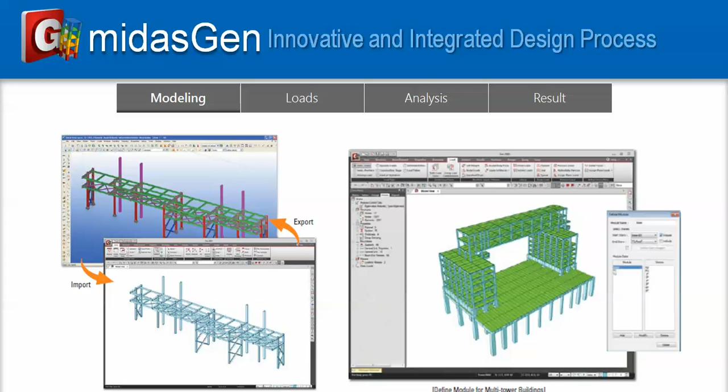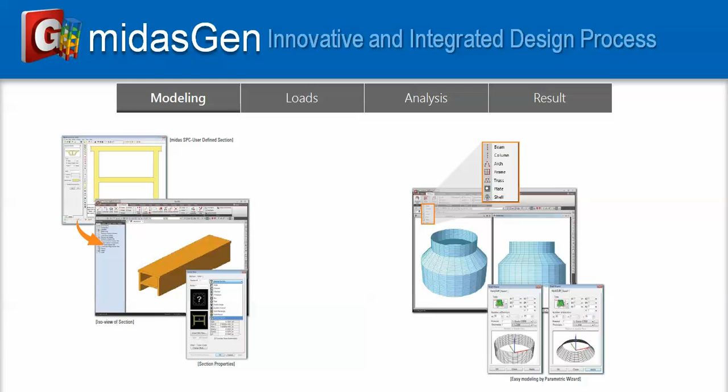Another one is ang tinatawag nating structure wizard. A unit of structures such as frame, an arch, a truss, a plate, even ang shell may be modeled by this automated modeling tool independently and may be combined later with the total model. Makikita po natin yan dyan. So, ito po yung isang advantage po ng Midas Gen na sa ating modeling pa lang po, may advantages na po siya.

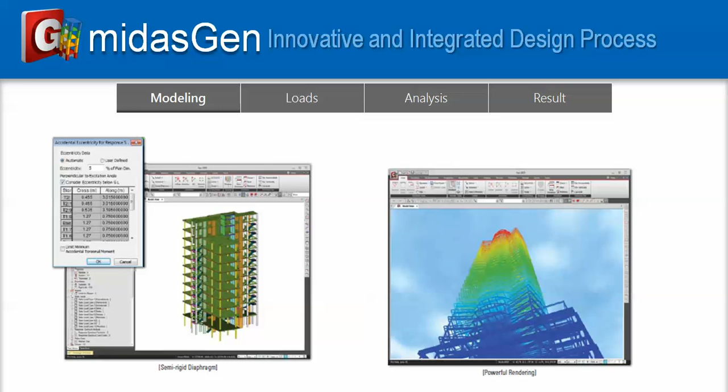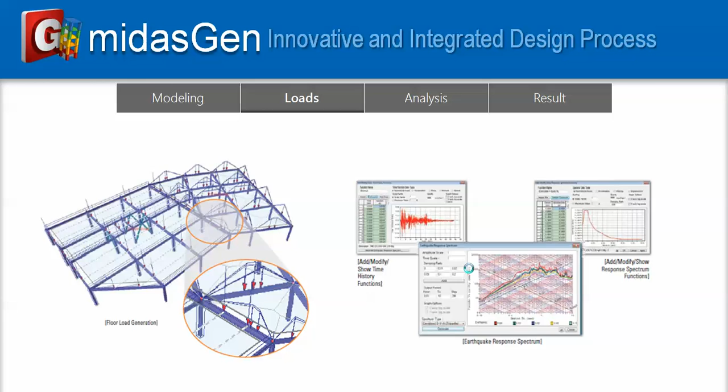Now, makikita din po natin dito sa ating dynamic loads, ang seismic analysis can be performed while implementing dynamic loads and nonlinear elements. Pwede po natin gawin yan dito sa ating MidasGen. Another one is ang static wind and seismic loads. Ang MidasGen, automatic siya na mag-generate ng static wind and seismic loads sa building structure natin on each story, as we can see in this photo. All one has to do is to provide the applicable standard and the building data.

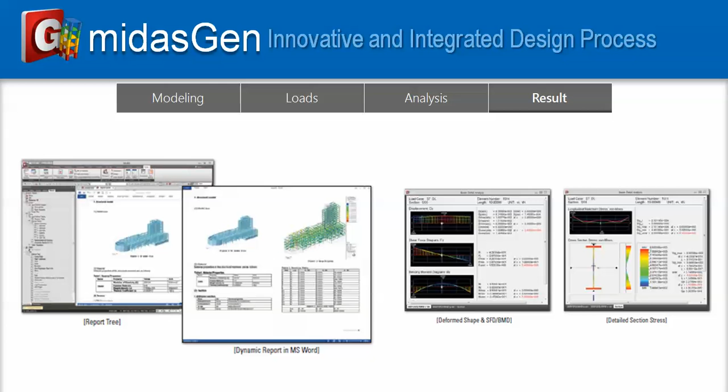And also, detail forces and stresses in beam members resulting from detail analysis of individual elements can be verified in the beam detail analysis. Any point in any section can be examined. So, ito po yung isa sa mga advantage po talaga ng Midas Gen, yung beam detail analysis, since we can analyze at any point and in any section na kailangan nating i-analyze.

Now, that's it for our introduction of Midas Gen.